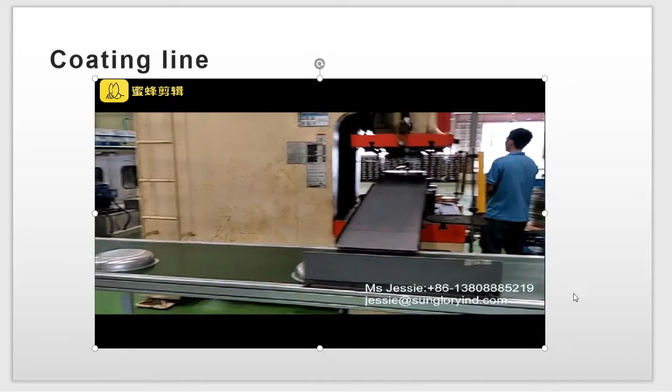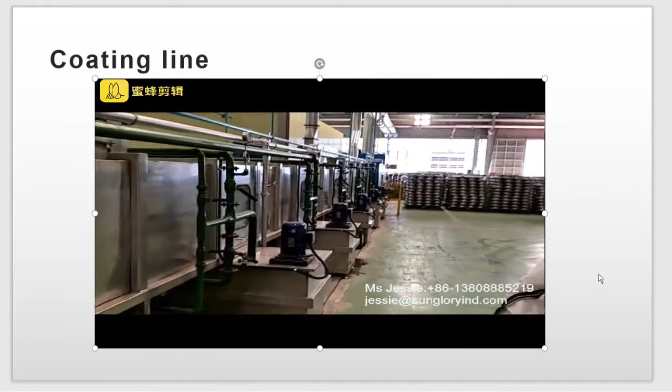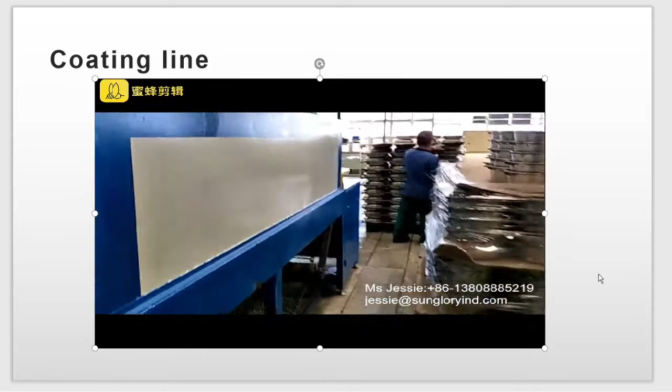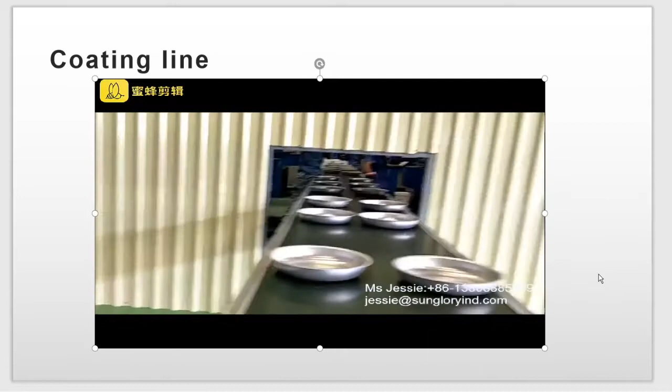This one is for the forming part, then it goes to the washing line. After washing, it goes to the sandblasting.

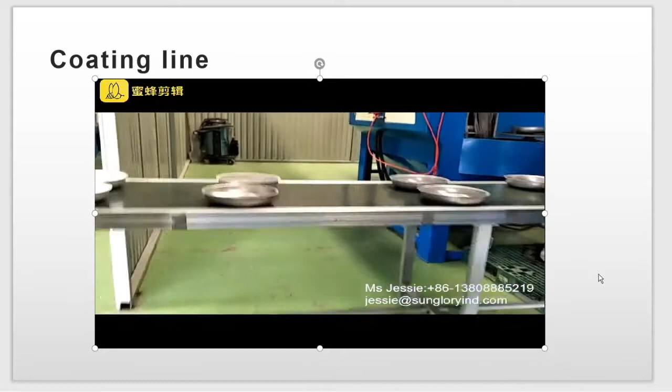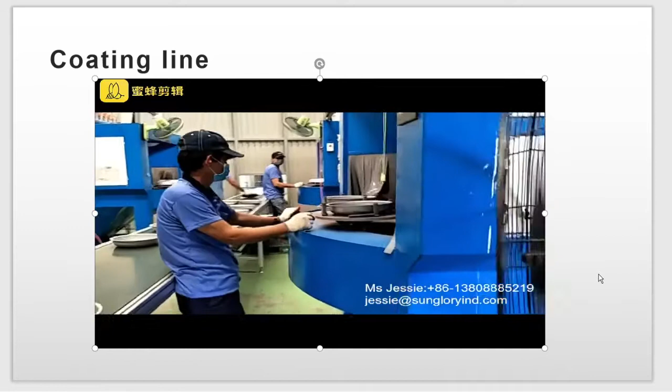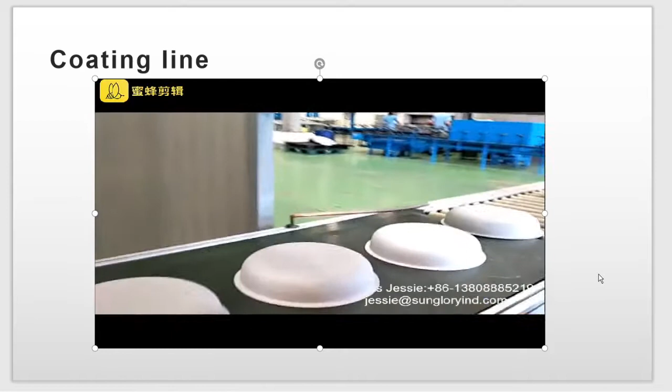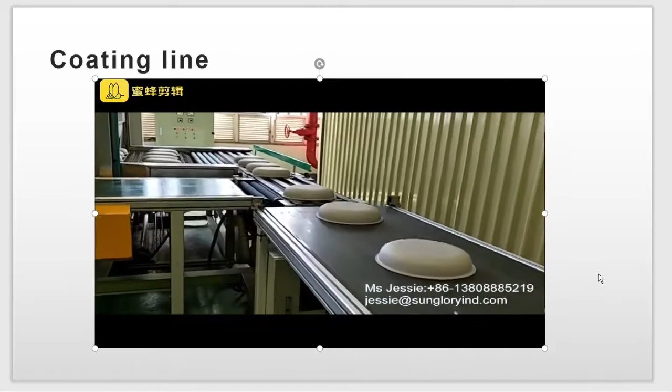Depending on the different quality, normally inside sandblasting is enough, but for some good quality products, outside sandblasting is also needed, like in the video. After inside and outside sandblasting, we need to go to washing again—only using water is enough.

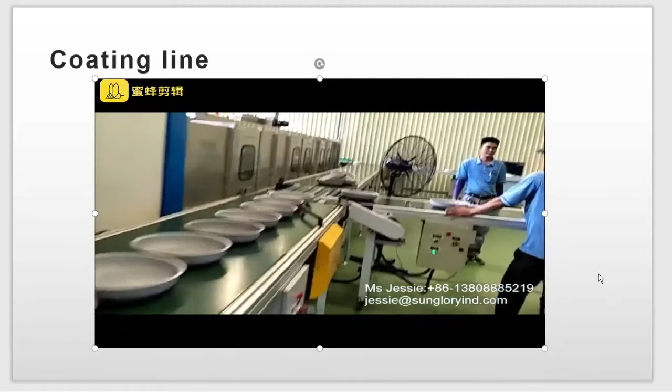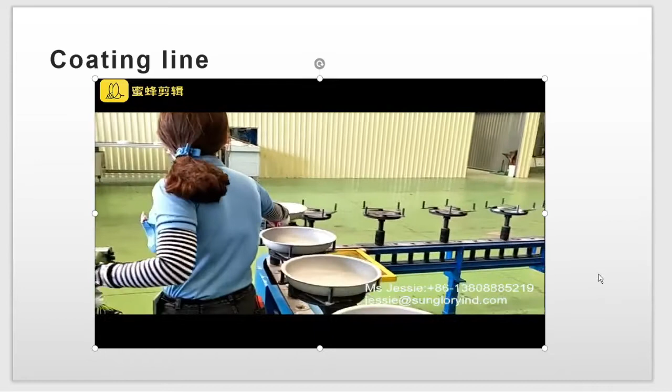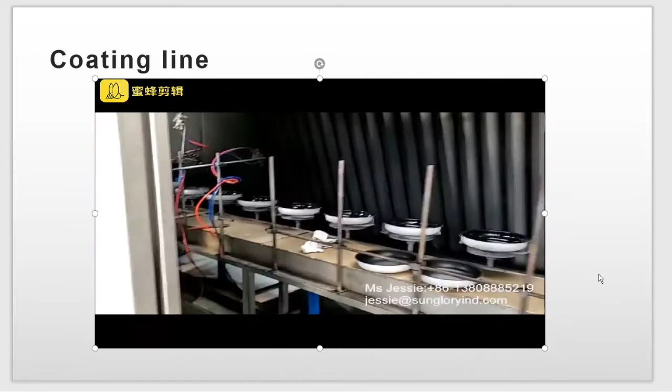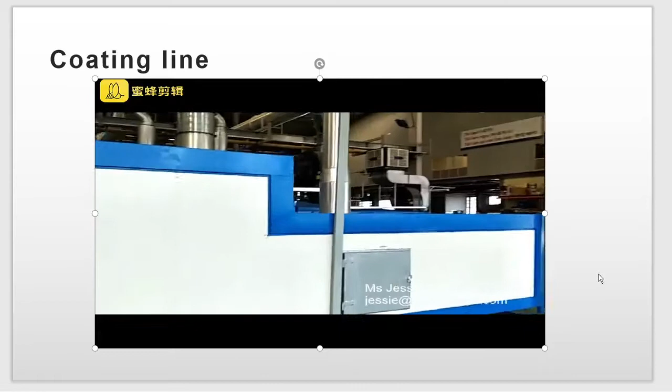Here's the loading for non-stick, then dust removal, base coating, base coating drying, and cooling.

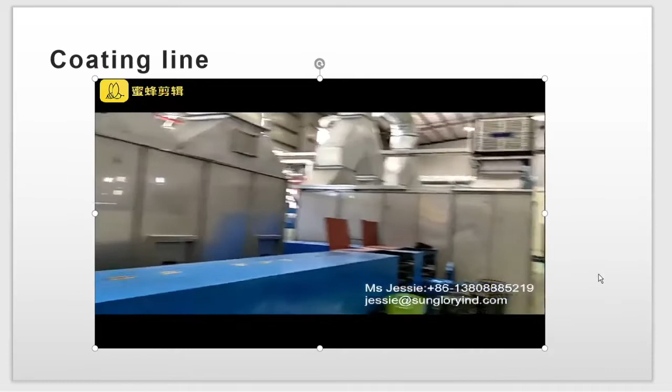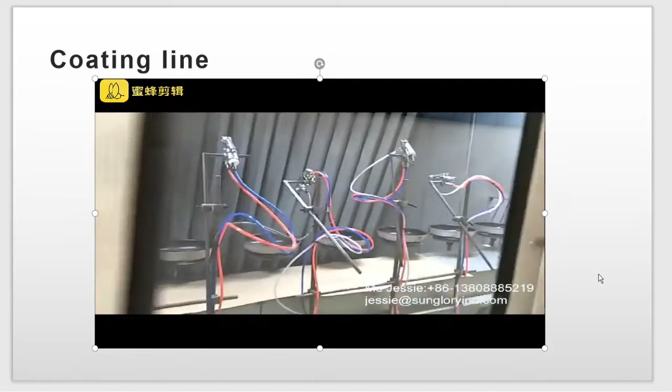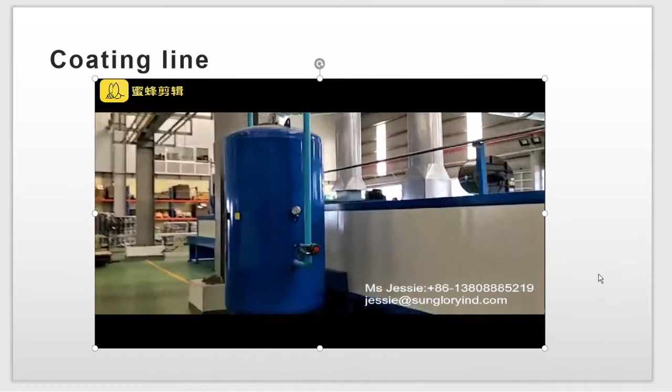This is the middle coating. After coating, it needs a high temperature drying.

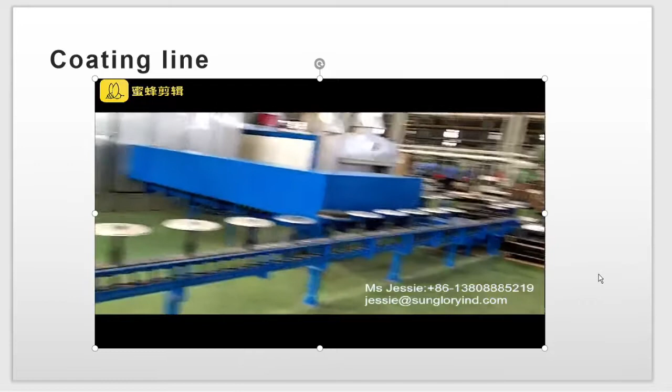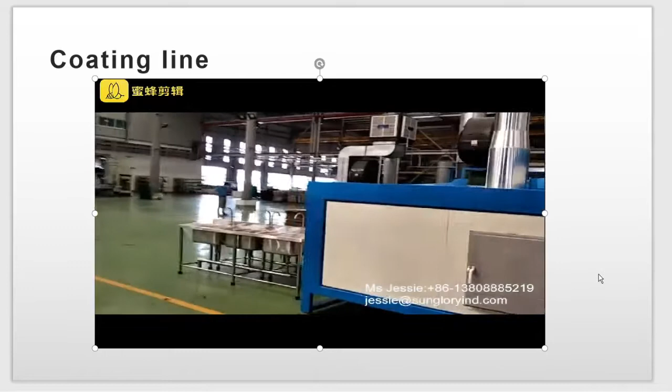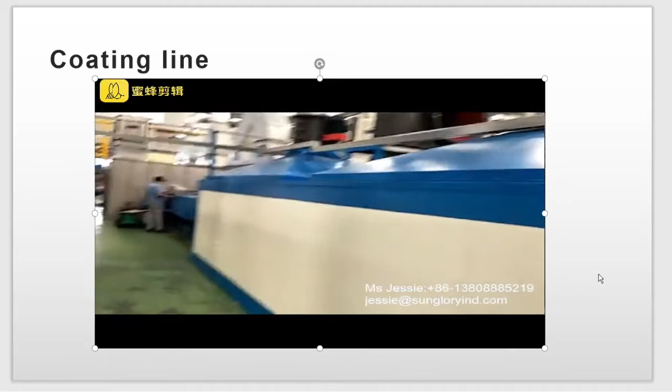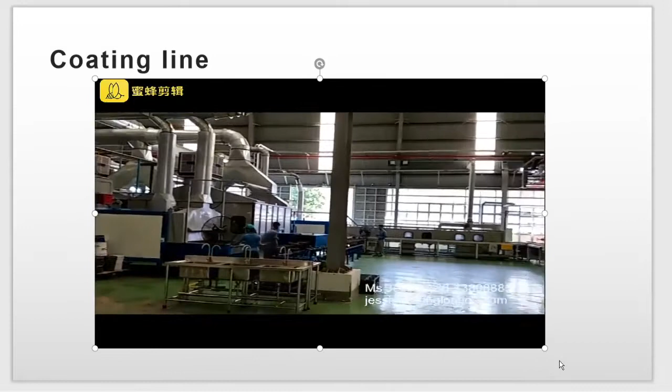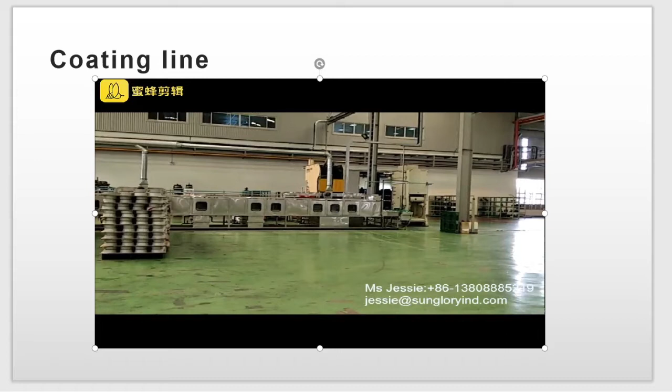Next, I will show some information to share with customers who want to upgrade the technology. First, I want to compare the semi-auto with the manual. Let's see this video first.

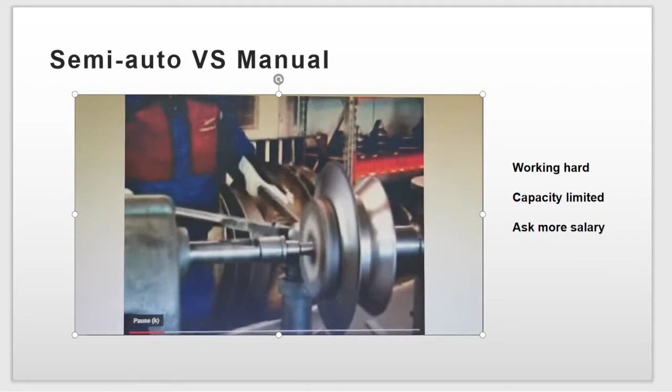It's traditional forming by manual spinning.